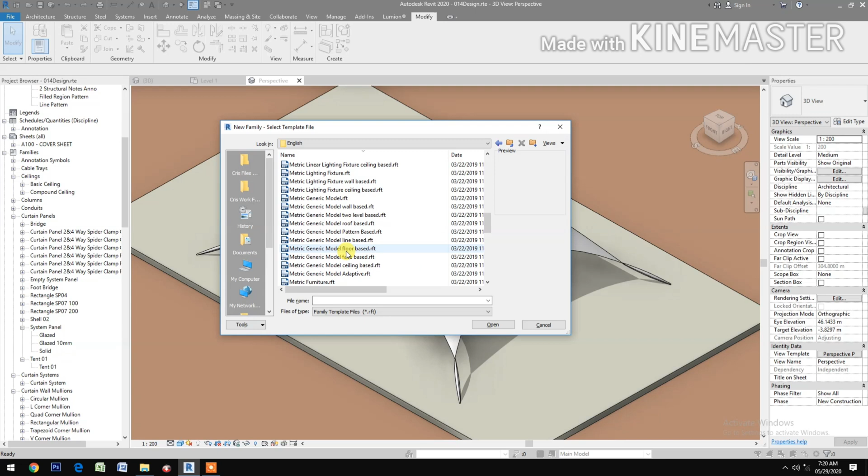Let's start. Go to File, New Family, go to Metric, and select Metric Generic Model Pattern Based. Open.

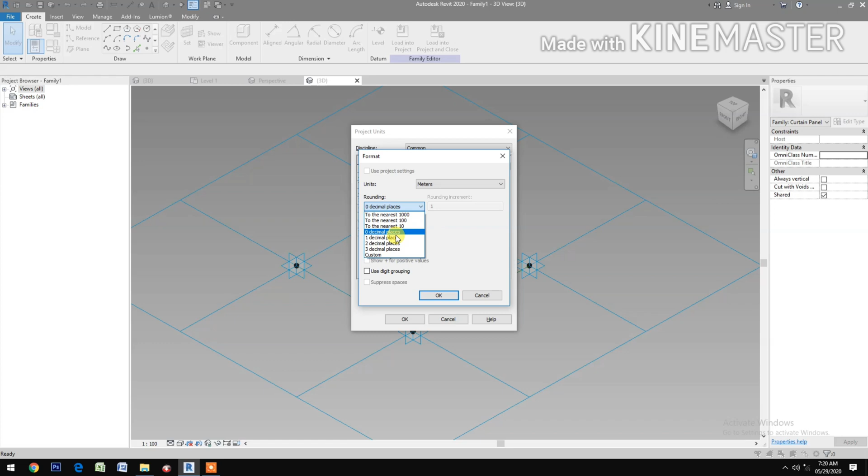Next, let's change the unit. Change the unit to meters, 0 decimal places. Okay.

Next, select the grid. Change the value to 10 meters, both horizontal and vertical spacing. Okay.

Next, go to reference point, select draw on work plane, then set work plane, and pick reference point. Set work plane, pick reference point. Set work plane, set, and pick reference point. Set work plane, set, and pick reference point.

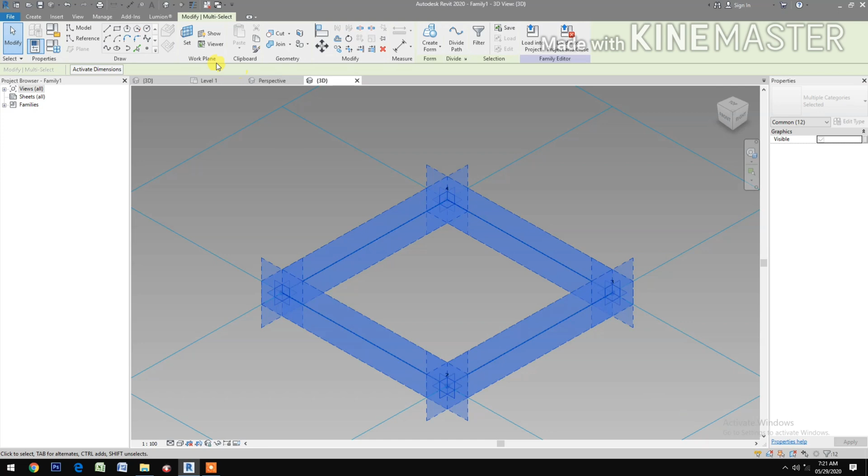Cancel the command, select all, go to filter, check none, select reference point. Okay, pick the button in the offset, create new parameter, then type height. Okay.

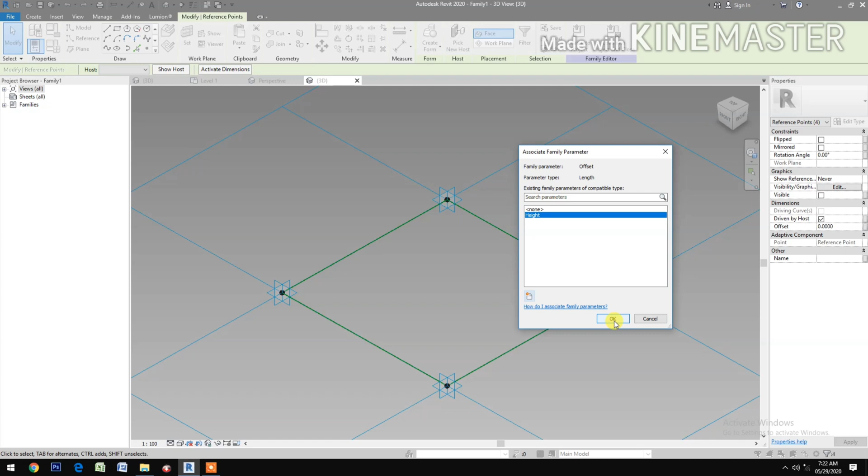Next, go to family types. Let's change the height to 3 meters. Apply. Okay.

Select the 2 reference points. Spline through points. Pick spline through points. Then check reference line.

Select 2 reference points. Then spline through points. Check reference line.

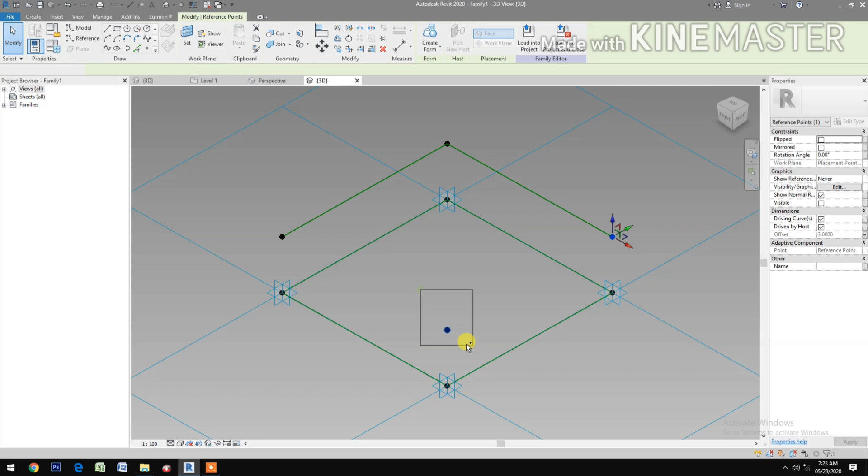Select 2 reference points. Select spline through points. Select, Control Tab, select, make it reference line.

Okay. Select 2 reference points. Spline through points. Check reference line.

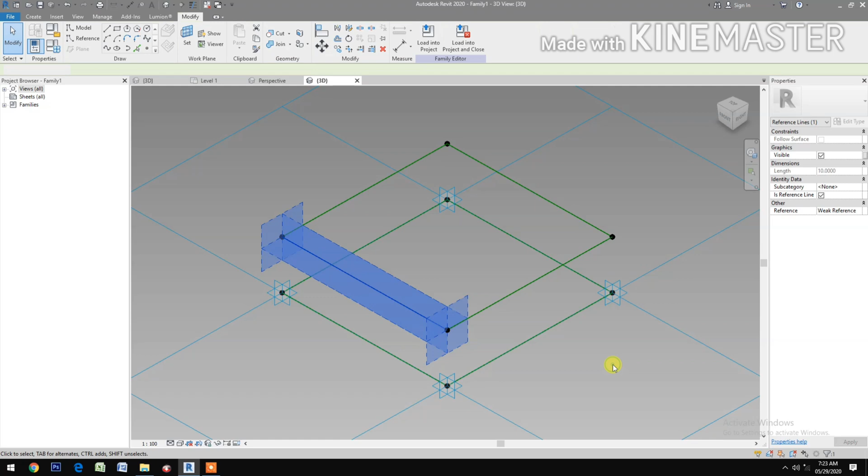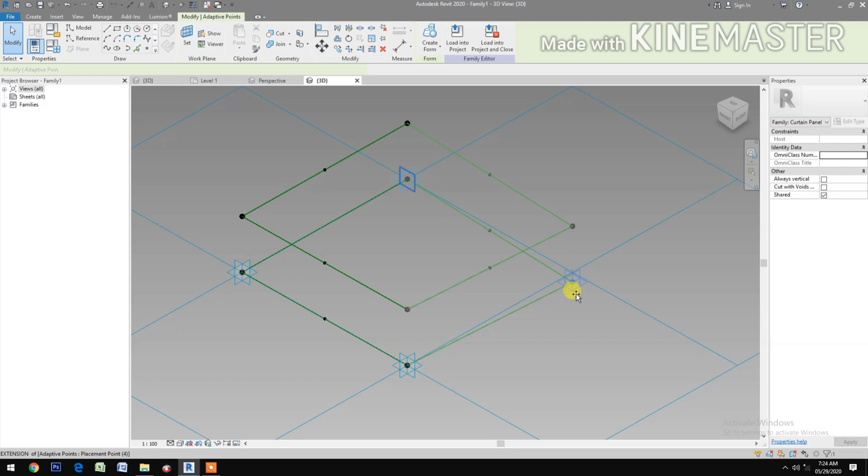Next, select reference point. Select draw on face. Pick at midpoint. Pick at midpoint. Okay. Pick at midpoint. Pick. Then pick. Okay. Next, pick at midpoint. Also on the other side, pick. Okay. Now test. Okay, good. Okay.

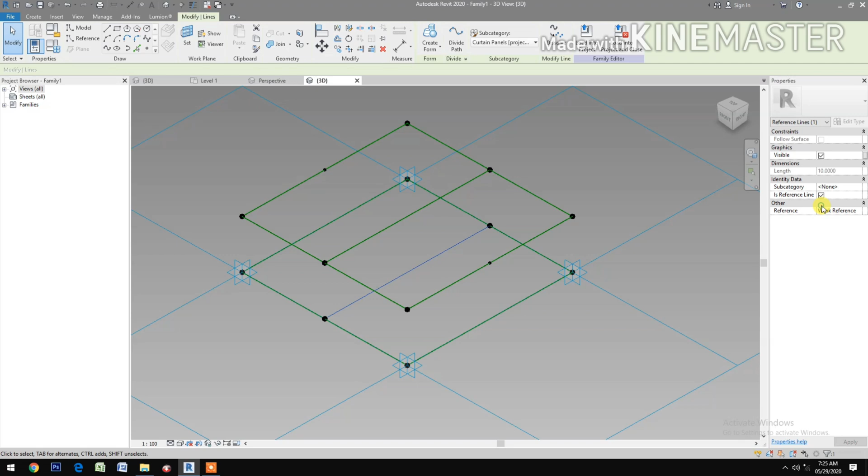Select reference point. The 2 reference points. Okay. Spline through points, then check reference line. Select 2 reference points below, select spline through points, check reference line, select reference point, pick at midpoint, okay.

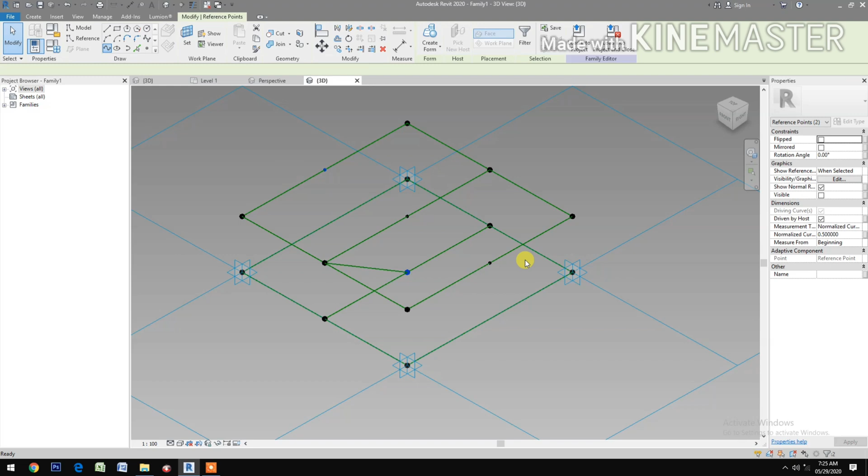Next, select reference point, okay. Select the 2 spline through points, check reference line, okay. Select the center reference point and select reference point, spline through points, check reference line.

Select the center reference point, okay. Select reference point, select spline through points, check reference line, okay. Select reference point, the 2 reference points, spline through points, select reference line. Now select the top center reference point.

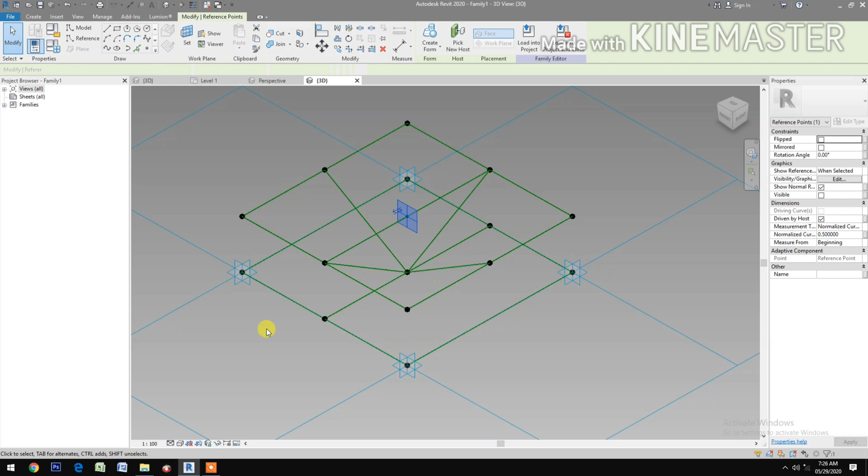Select the corner reference point, spline through points, check reference line, okay. Select the top center reference point, select reference point, spline through points, check reference line.

Select reference point, select reference spline through points, check reference line, select reference point, select spline through points, check reference line.

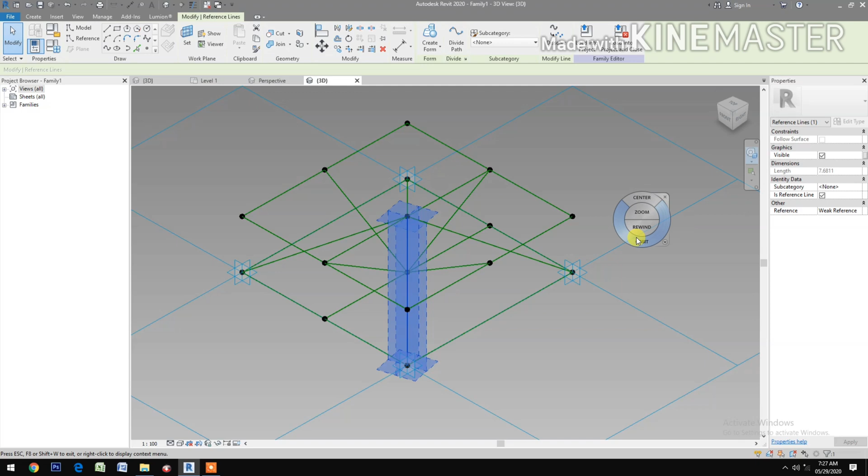Okay. Let's rotate a little bit so we can see the center point clearly. Next,

Reference point, pick reference point, okay. Select the 2, select normalize curve parameter, pick the button, create new parameter, type NCP1, okay.

Select the reference point, let's change it to End so it's the same as the other reference point. So make the value, change the value to 0.3, okay. So they have the same now.

Select reference point, pick, okay. Select the 4 reference points, okay.

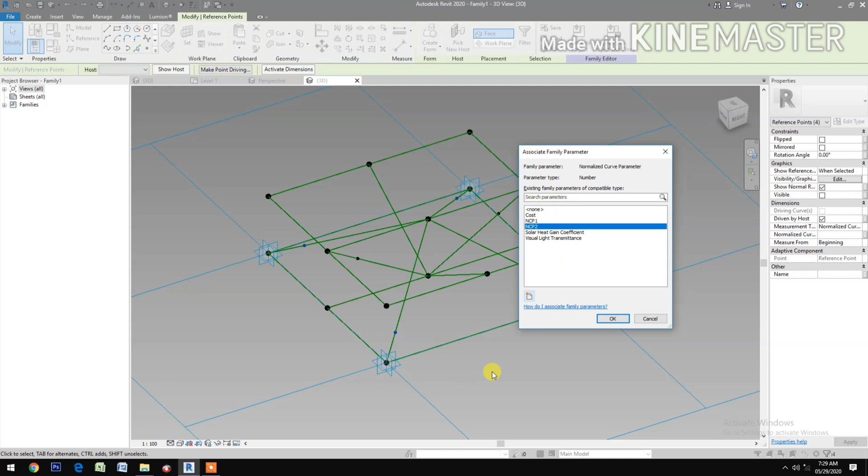Next, change the value of NCP2 to point 1. Okay, let's select this one, so change it to End. Okay, so all the same now, all the 4 reference points. Go to beginning. Okay, go back to End, so they're all the same position.

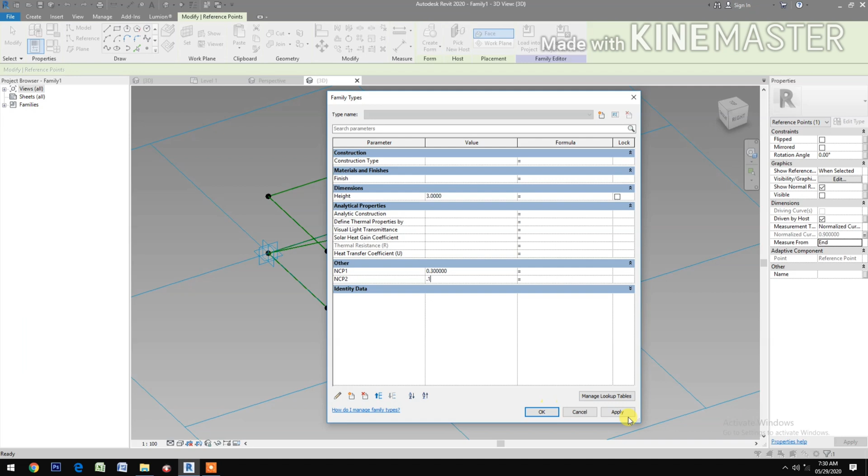Okay, let's go to family types, change the value of NCP2 to .1, apply. Okay.

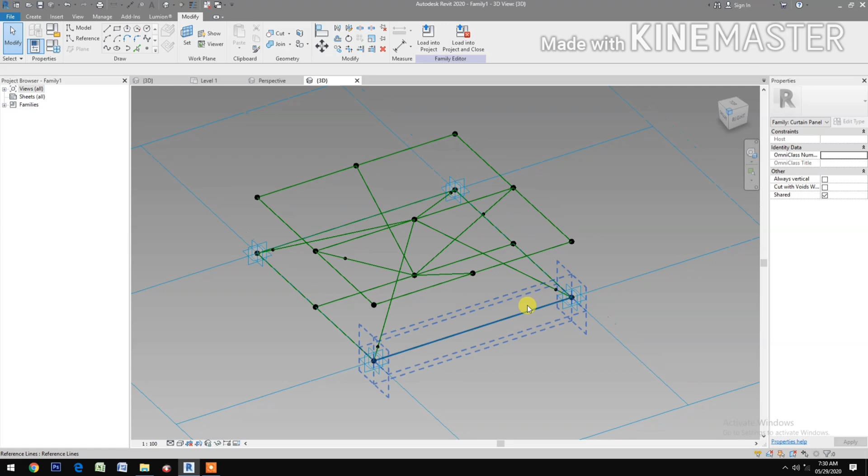Next, select reference point. Okay, select. Why is that? Let's rotate the view. Okay, now select reference point. Okay, select and select.

Okay, select the reference point, the 2 reference points. Go to normalize curve parameter, pick the button and select NCP1. Okay,

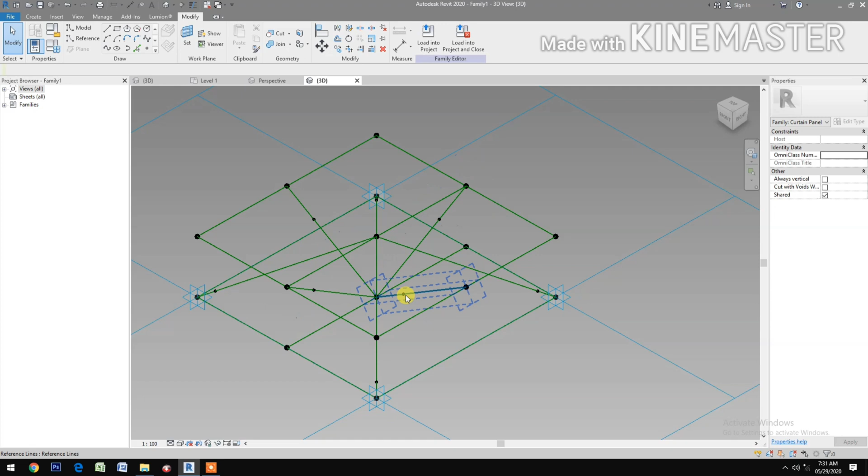Next, let's orbit the view. Okay, select this reference point, change it to End, so they have all the same position.

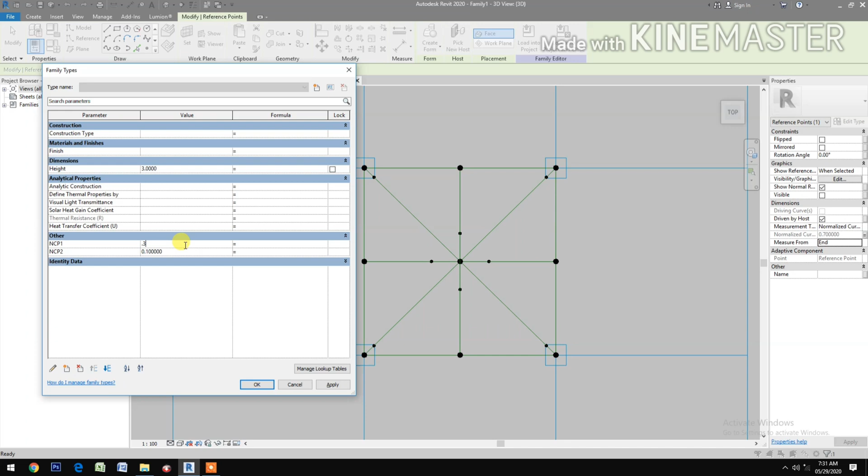Next, NCP1, change it to 0.3. Okay, let's go back to 3D.

Spline through points. Okay, make sure draw on face is selected, pick, cancel, select the spline, check reference line.

Okay, spline through points, pick and pick. Okay, cancel the command, select the spline, check reference line.

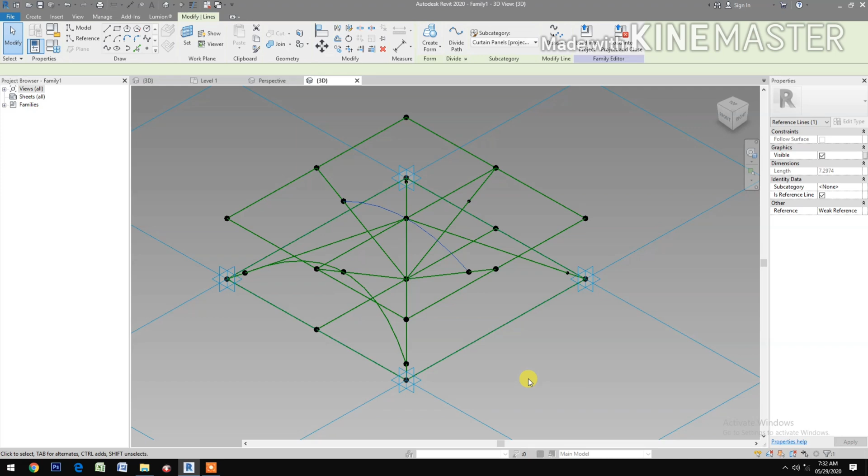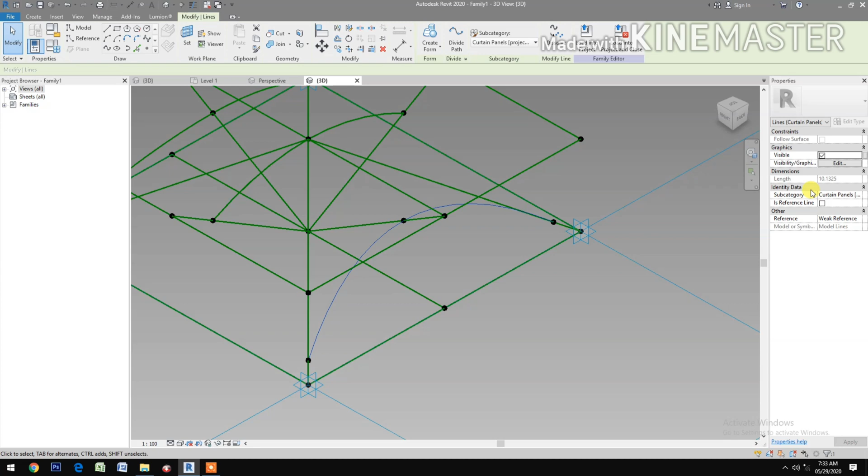Okay, rotate the view. Okay, spline through points, pick, then pick, cancel command, select spline, check reference line. Okay, go back to the view, select the 3 splines.

Next, create a form. Okay,

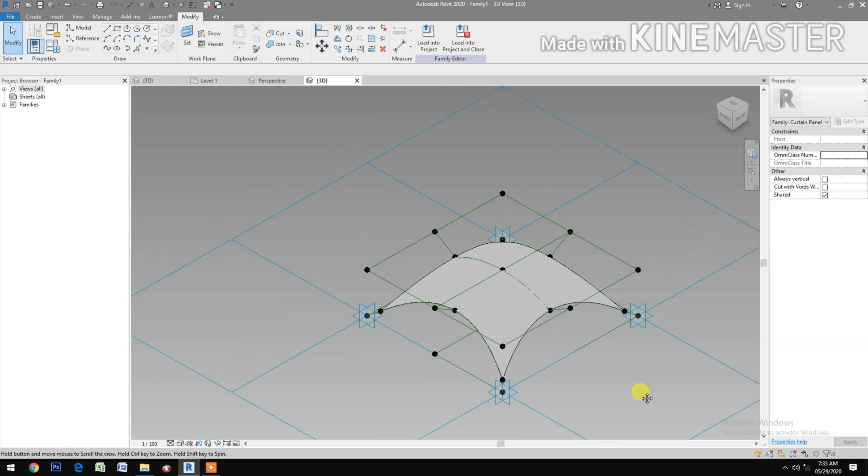Let's change the parameter, make the height 5 meters. Okay, let's change NCP1 to 0.4, apply. Okay,

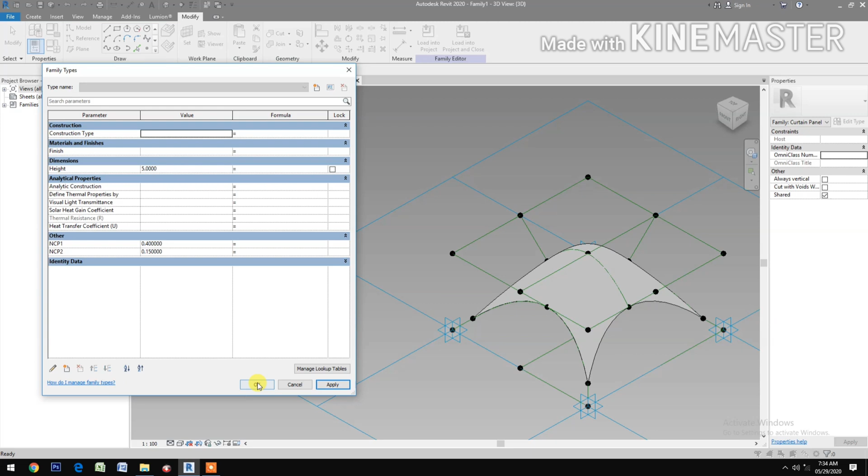NCP2, let's change it to 0.15. Okay, next,

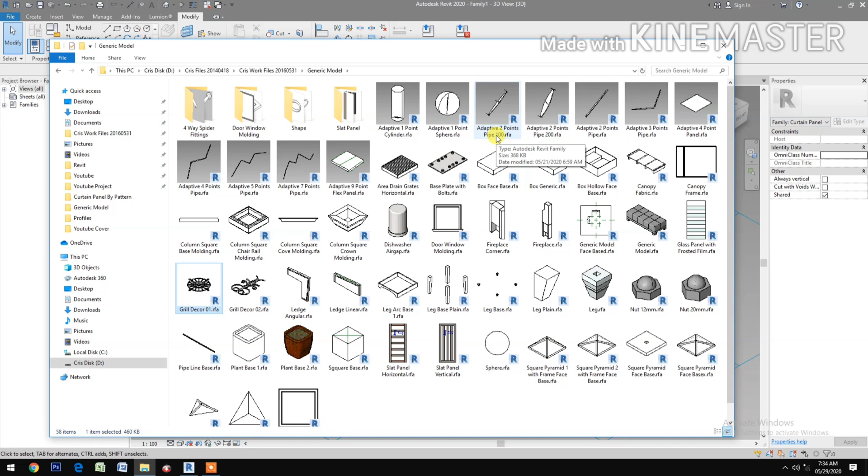Let's load up the 2-point adaptive component. Okay, for the support. Okay, select, open. Okay, let's load this to the project. Family 1. Okay.

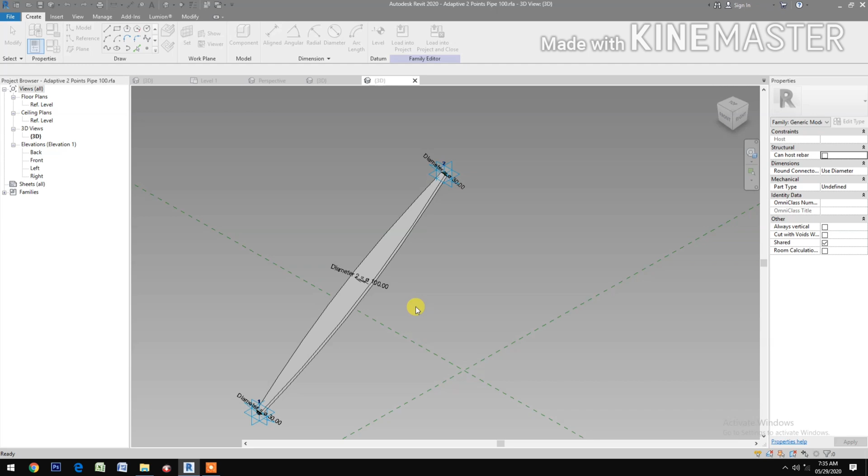Again, select place on face. Okay, let's zoom it out. Okay, select a reference point. Okay, select, cancel.

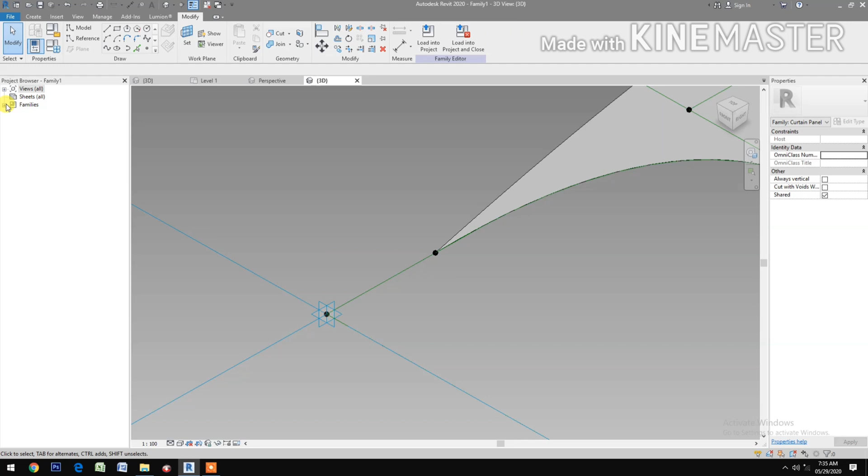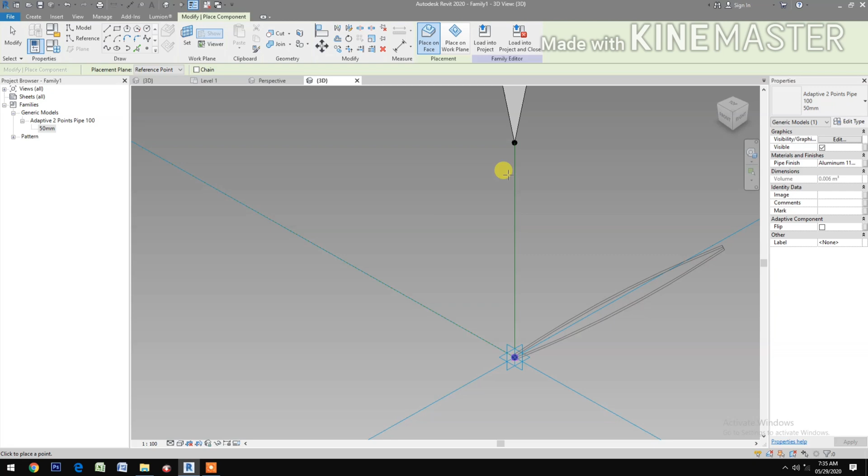Okay, so load the component again, pick, drag, pick at the reference point, then pick. Okay, next, pick at reference point, then pick.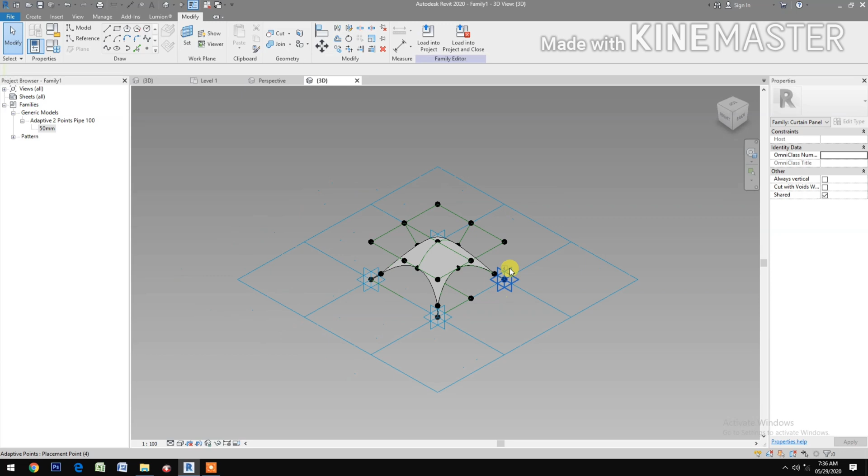Okay, next, pick reference point, then pick, cancel. Now let's rotate the view. Okay, insert the component, pick at reference point, then pick. Okay, it's finished.

So let's try to change the value. Let's say NCP2 0.3. Okay, good. Back to 0.15. Okay,

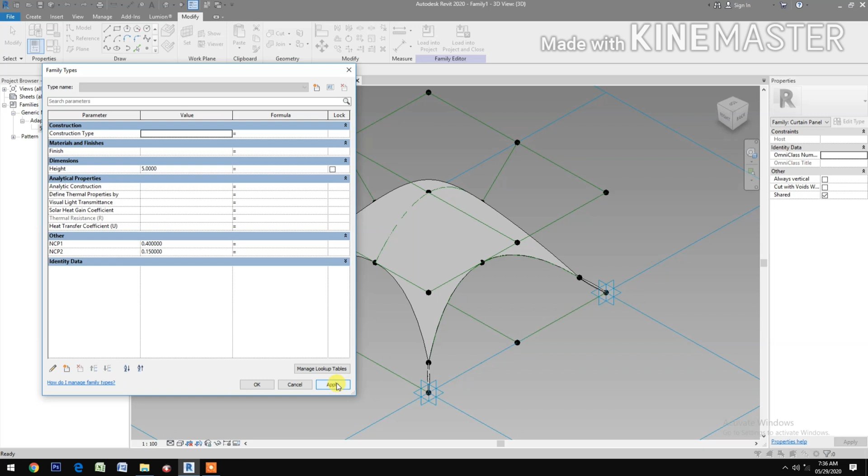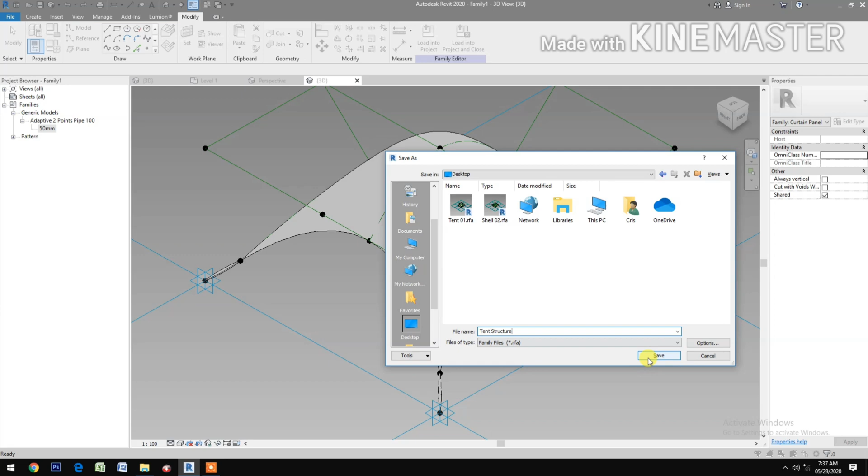Now let's save the family. Let's save it to the desktop. Change the name to Tent Structure. Save. Okay,

Close. Let's do it again. Save. Tent Structure. Save. Okay, load into project and close.

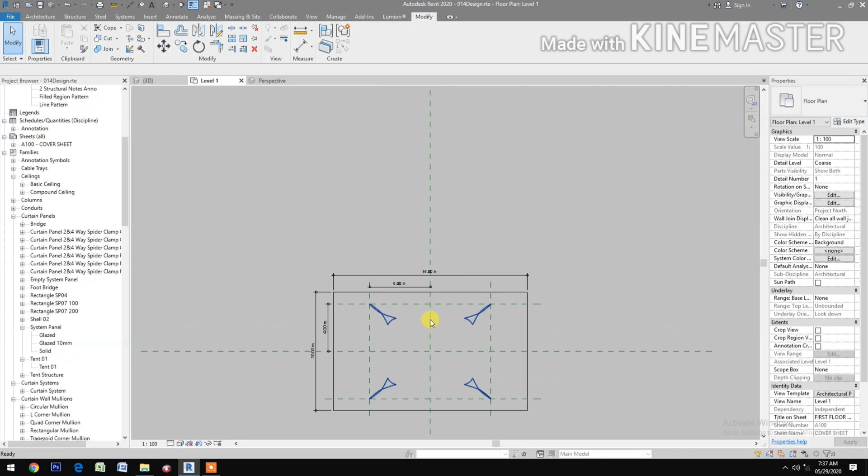Okay, now let's try to make that component. Go to Massing & Site, in-place mass.

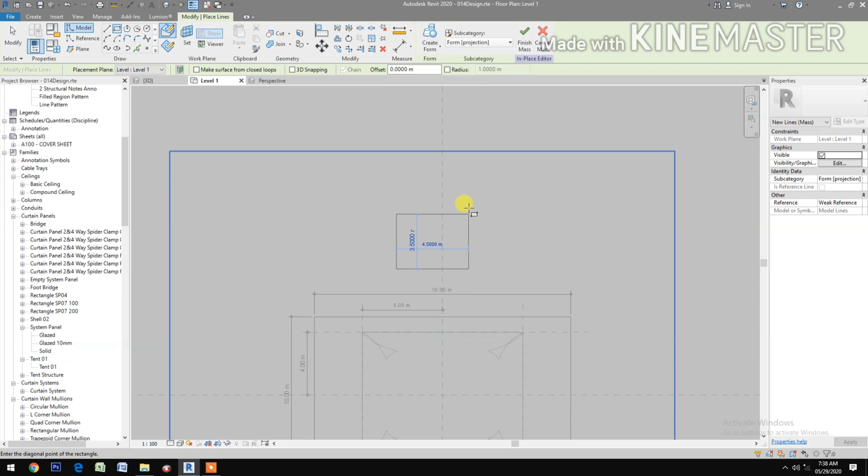Okay, mass 2. So select a rectangle, select any size you want. Okay, let's say, then finish the mass. Okay, select, edit again, go to 3D. Okay, select the rectangle, create a form.

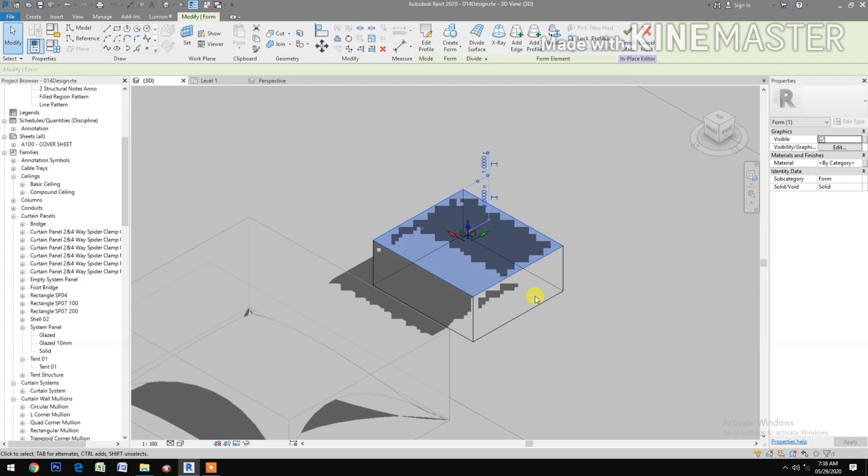Okay, now select the bottom surface. Okay, the bottom surface. Okay, divide surface. Okay, change the U grid number to 1 and the V grid number to 1.

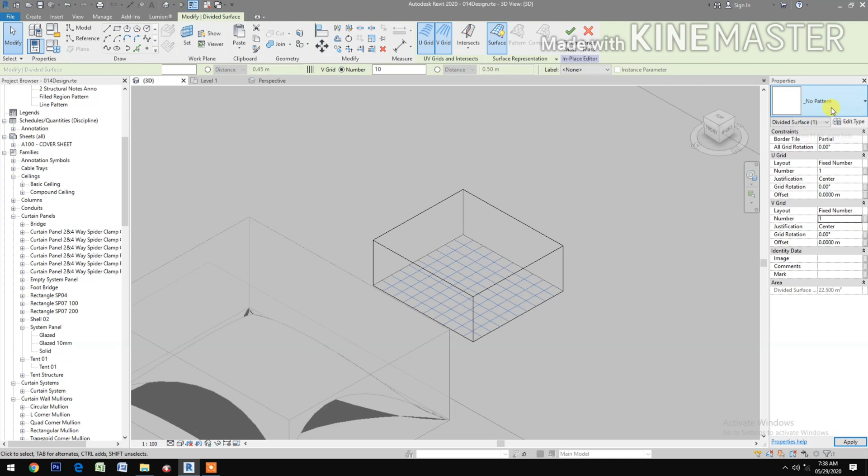Okay, then select the pattern, the one we did, the Tent Structure. Okay, select. Okay, and component flip. Okay, good.

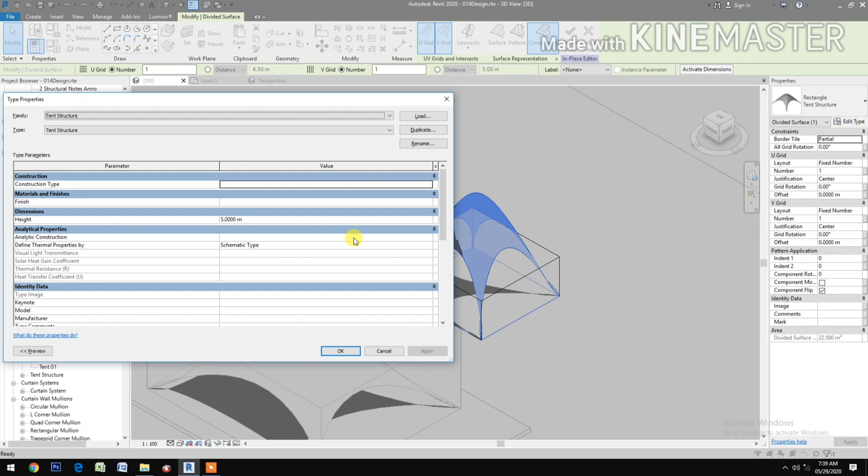So you can select the component, the pattern, go to edit type, and you can change the height, say 3 meters. Okay, good. Okay,

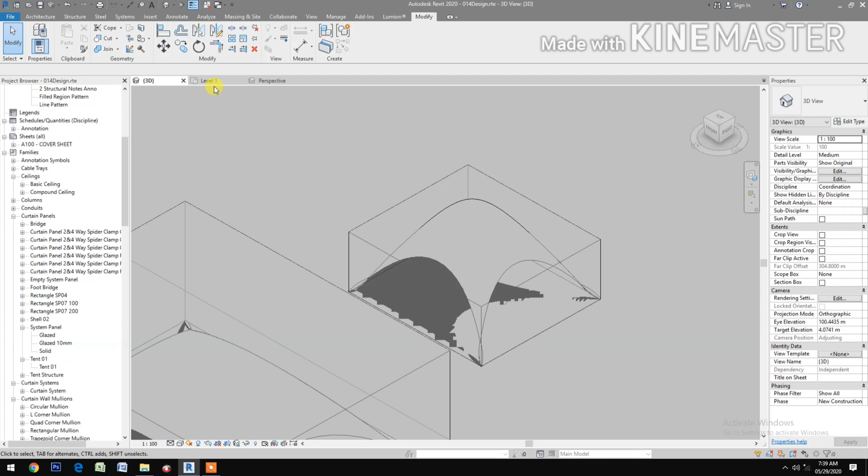Let's finish the mass, save the project. Okay, let's turn on the show mass. Okay, so you have the Tent Structure.

Now let's go to perspective. Okay, so you have the... Let's go to edit type. Let's change the NCP1 to 0.1. Apply. Okay, good.

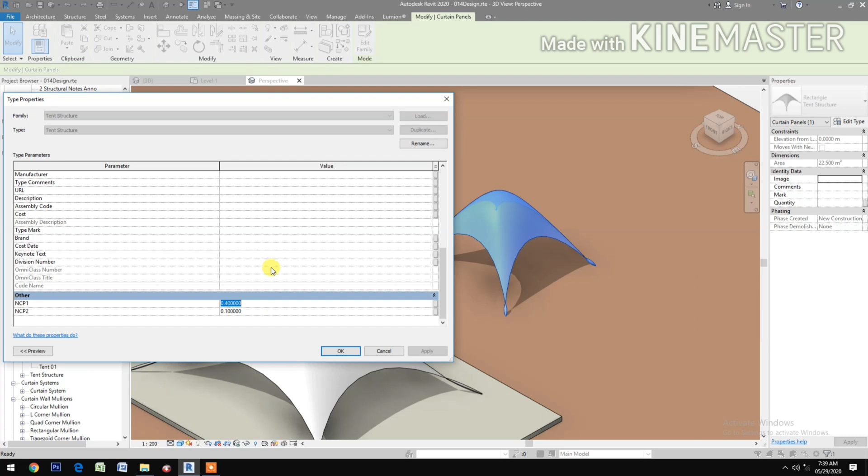Okay, next let's try to insert the component directly to the project. Okay, just select place on work plane, so you need to pick four, okay, pick and pick.

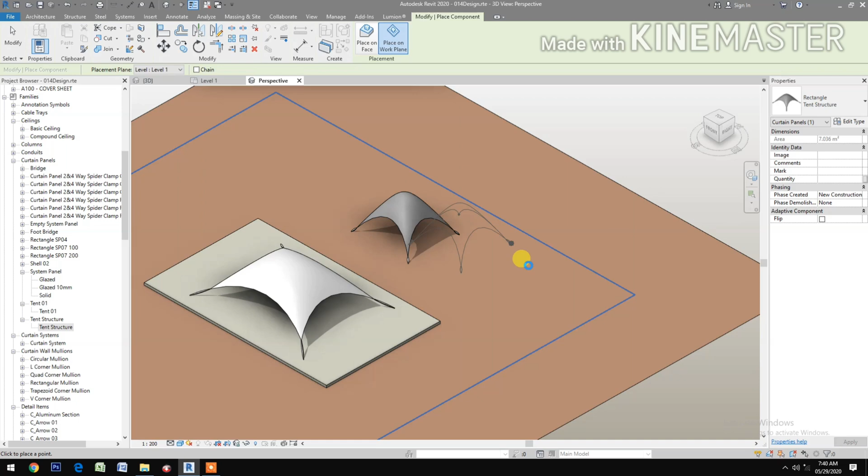Okay, finish, select the component, flip. Okay, now we have the finished 3D model.